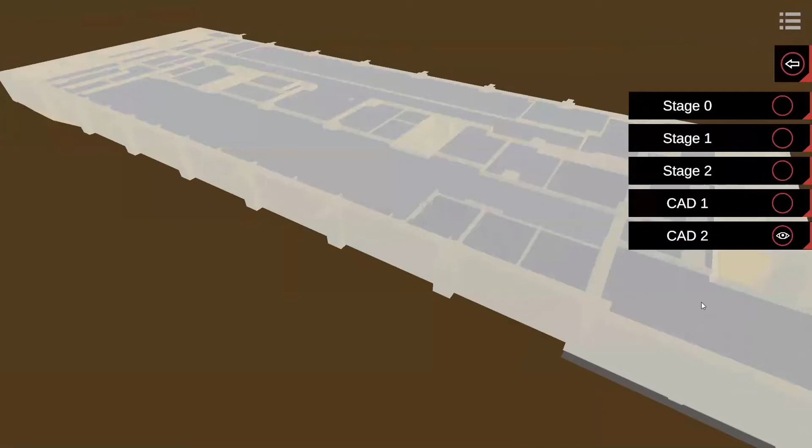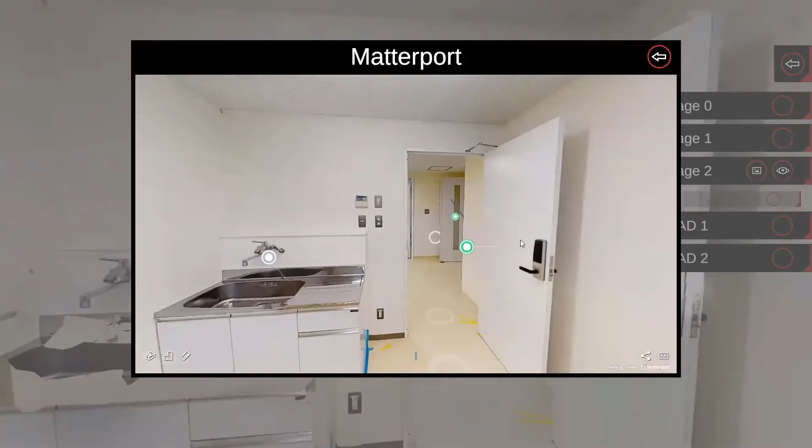So we are working for the digital construction department within Nohara, our team, and we provide services within BIM, consulting, 5D cost estimation, and digital twin solutions together with our partner SimLab. A video I'm showing you right now is our latest project together with our partner SimLab, and we're showing you here Okubo Hospital, which is displayed in the Stages app from SimLab.

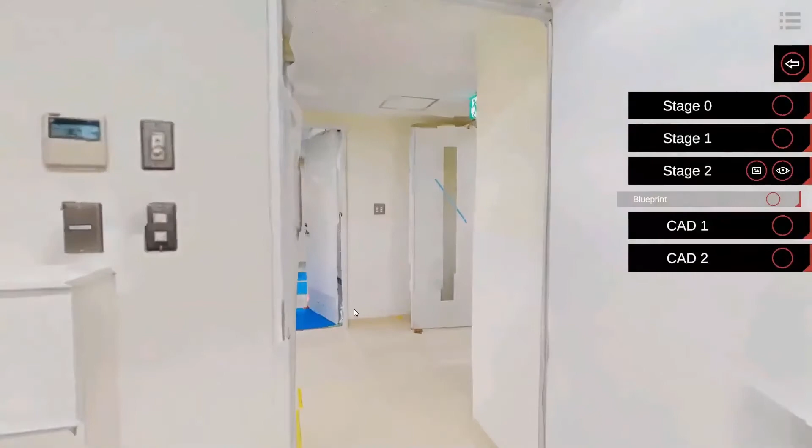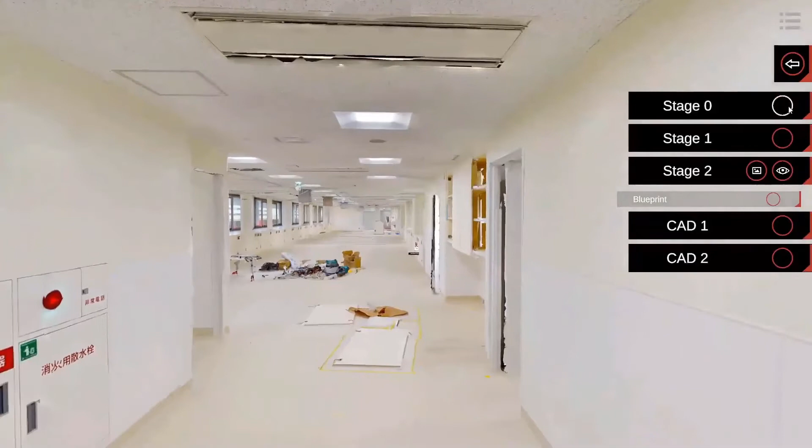What you can see here is a Matterport 3D walkthrough; we used the Pro 2 camera to scan the hospital. We went there 3 times and did 3 stages of scanning. And of course, we tagged all the Matter tags here with information for our MEP contractor for medical gas, ventilation system, and doors. All the construction material that we provided for them.

So let's have a look at the current state of construction. What I'm showing you here is no groundbreaking news. You've seen it all. You've heard it all before. The construction business has generally been considered a traditional industry with limited appetite for innovation. We all know that. The economic sector with the lowest productivity gains actually, but we are all participating in this event to change that, right?

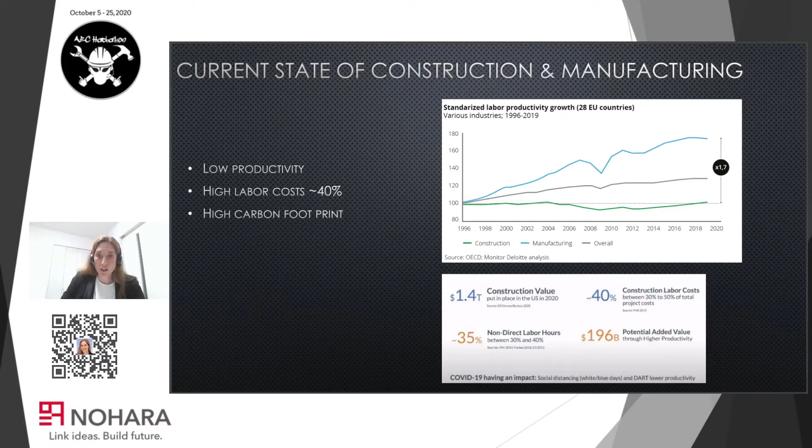We also think that companies like Nohara that are manufacturing and reselling materials can make a change because construction materials are closely related to productivity. They can have significant impact on labor costs as well as on the quality and sustainability of the assets. And let's not forget, there is a huge potential. When you take a look at the top 100 global construction companies, you will realize that 15 companies are from Japan. So there's a huge potential.

So what are the challenges in our industry? There are some specialties to Japan. And when it comes to Japan, you probably heard of the chronic labor shortage that is caused by the nation's shrinking working age population. Also, what is special to Japan is natural disasters. There is, for instance, the Pacific Ring of Fire. And that area is just around Japan in that region. And it happens to be that area where 80% of the largest earthquakes happen. So basically a pretty dangerous place to live.

So what are the external industry challenges that Nohara is facing? So let me give you an example of the current estimation process. Let me paint you a picture of how it looks right now. So a subcontractor will receive a bill of quantity from a general contractor, and this subcontractor is an interior contractor for LGS profiles and partition walls. So he will receive this BOQ probably in an Excel file or PDF format and some 2D drawings in PDF. The line items in the BOQ will probably be like total amounts. Maybe if he's lucky, there are some amounts per room, but he basically has no clue where those quantities are.

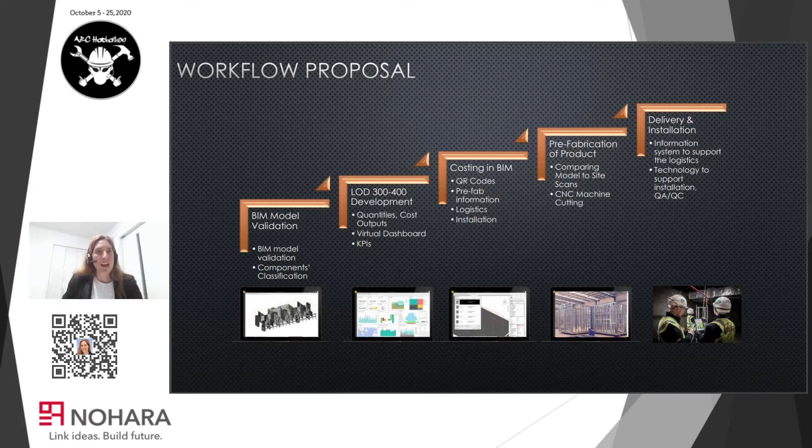Then we can match the models with real-world scans to ensure CNC machines receive accurate data for cutting parts needed for site delivery. So this is the rough workflow of our proposal. Now I'll hand over to my colleague Adam Piaskowski, and he will explain this workflow proposal in more detail.

Thank you, Stephanie, for the context and for the timeline of our presentation. I'm going to jump straight into model validation. In order to validate the models, I want to highlight the biggest obstacle when we do costing or detail enrichment: the quality of the models. That's such a big obstacle, and it's like a foundation for everything else. If we get this wrong, everything else is going to have problems.

To ensure the foundation is correct, we need to share what is part of our process with the rest of the team, so they can incorporate our considerations into their workflows. The easiest way to do this is to create a guideline which we can easily explain, helping the rest of the team involved in model creation understand how to set up the file so it's reduced of most errors.

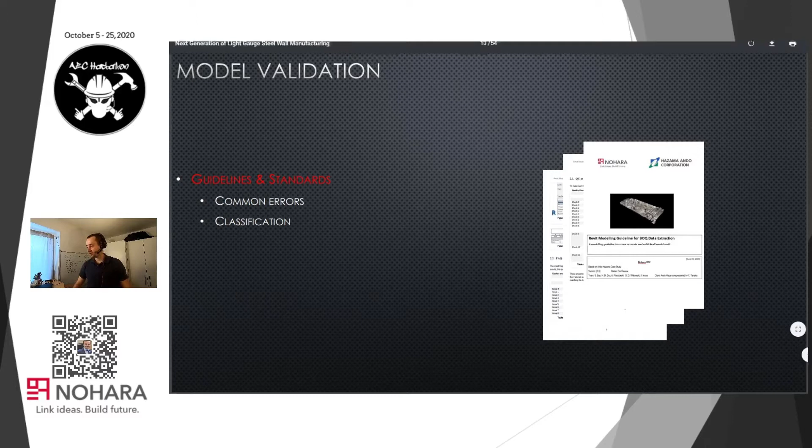Let me show you a couple of common errors we have in the models. First I should refer to a method for validating those errors. Every model has warnings, Revit warnings, and usually it's common practice to ignore them because Revit tells you that you can. So why would you not ignore them? Then often there are problems which you can't resolve.

For example, part of the frame inside a door family is going through a wall, and you know this is the size of the door and this is the size of the corridor, and you want it this way, but maybe something is wrong inside this door family causing that clash. Later when we take quantities and check the area of this door, it's reasonable this error shows up. Maybe there's a floor clashing with another floor, which creates an overlap and increases the area or shows inaccuracy. Maybe there's two walls overlapping, or a wall slightly off axis, and when we try to generate geometry inside that wall, all the generated geometry will have the wrong reference point and be slightly skewed.

So we do have tools where we can check what kind of error this is and what kind of warning message it gives.

We can also highlight using Dynamo what kind of errors are where, and this is a little bit easier to troubleshoot than troubleshooting the Revit warnings, because Revit warnings just give you a general list, and then you have to press on each warning and it will tell you where that warning is located, and it can be a very lengthy process.

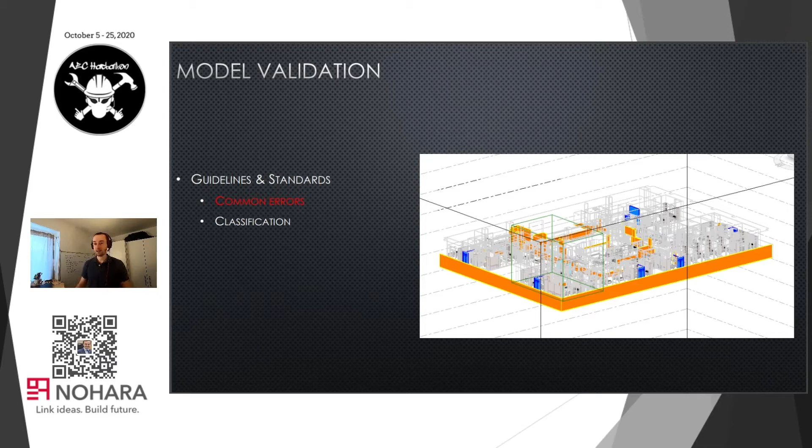But there are also warnings which are not very visible or not even highlighted by the warning script. For example, when we generate finishes, sometimes the door geometries are perfectly fine. They're cutting the void through the first wall, but maybe not cutting voids outside of that first wall. So if we add a couple of millimeters of baseboard, this baseboard is not going to be cut because the void of the door is not long enough.

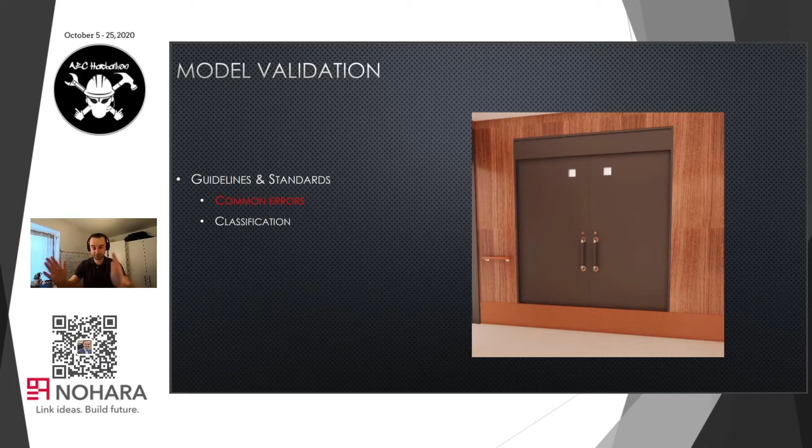There are also other errors which are actually very easy to make. I don't know if you guys ever tried inside of Revit joining 3-4 walls of different type, of different thickness, where maybe their layers are slightly offset, which is maybe the way it should be, but Revit doesn't want to really accept that.

And sometimes there's a small omission, and for example a wall goes a bit longer over the connection, and then once we want to generate this wall, it will take each one of those walls as separate elements, and that little partition part of the wall with the wrong wall type will be framed as the wrong wall type and will give us inaccuracies again.

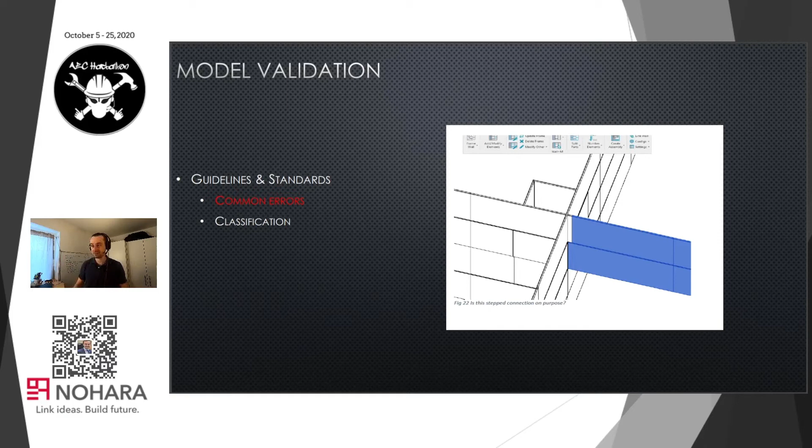And then lastly, we have classification. It's a common standard to use different classifications. In our case, we are mostly looking into Uniclass, which is very popular right now in the UK. Before that, we were using MasterFormat. I know there are many other standards in Europe, Australia, New Zealand, the US, and so on. We can actually assign any of these classifications.

However, they all kind of lack certain components. They lack certain precision at our level of manufacturing, so they are more general, more general for systems, more general for products. However, they often don't have the distinction between the same product family but different thicknesses of those product families, or maybe systems which have different spans between the studs, in our case for steel structures.

So we are creating our own classification code which can accept any kind of differentiation that we want to achieve, and we basically go with a code. We go with the most obvious part, which is our standard classification material code. Then we add the layer thickness, then we can add stud information, then insulation, then the stud profile, and so on. So we can very accurately specify what kind of information should go into these.

And then we can of course link other classification codes, and often we see that there is a repetition - the same classification code for different codes. That clearly shows that we don't have enough distinction to cost these elements using the standard classifications.

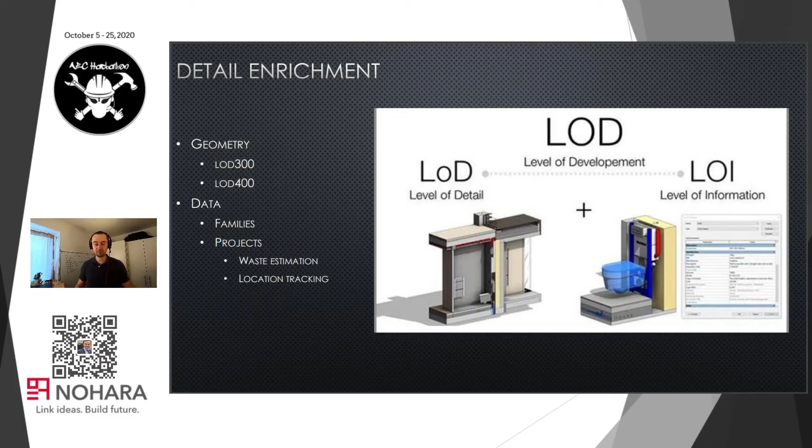And then at LOD 400, that's where we add more detailed information - that's when we generate specific plasterboards, steel profiles, screws, connections, etc. And then we also add data to those elements, both at LOD 300 and 400. That's where we add information about the location of those elements, the waste estimation, the parameters distinguishing projects and families, and also how we can choose those projects and families that are a composition inside of our model. So there are different levels of development, and basically it goes from a lower level of detail to a higher level of detail.

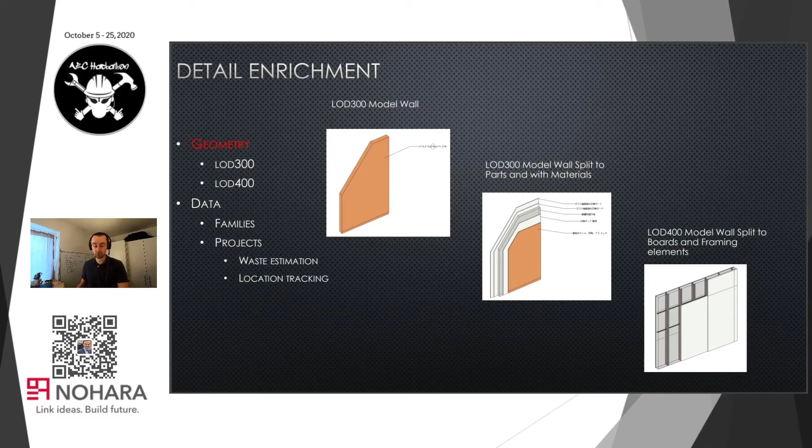In our case, if we enrich a level of detail for a wall, we start with just a generic wall. We add layer information to this, and then split it into parts, where each layer is a separate part. Then we use AGACAD, a software for detailing, to split those layers into smaller parts using horizontal and vertical grids, which divide our plasterboards with rule-based schemas. They replace wall layers and place steel studs inside of those layers. So this is how we add information to geometry from data.

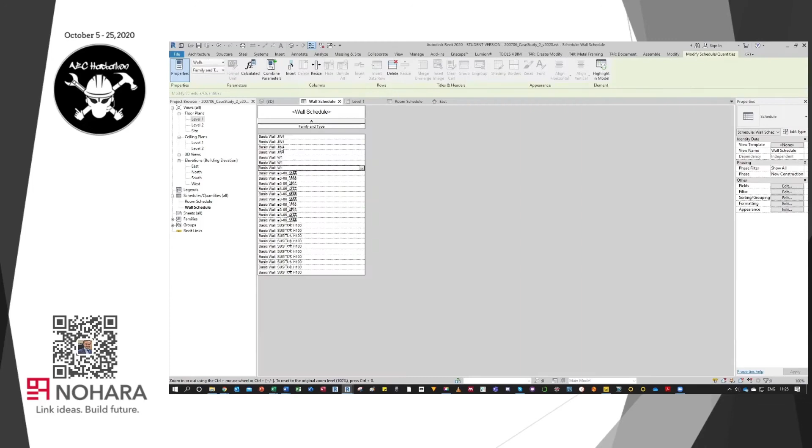For example, we can generate finishes and baseboards. Here you can see how we generated this paint layer, which is separate from the main wall. We can also frame the main walls, select just these main walls separately, so we can cost these layers separately. The importance here is that we can have a structural wall that goes between many rooms and then have finishes that are dependent for each room. So it's a nice division.

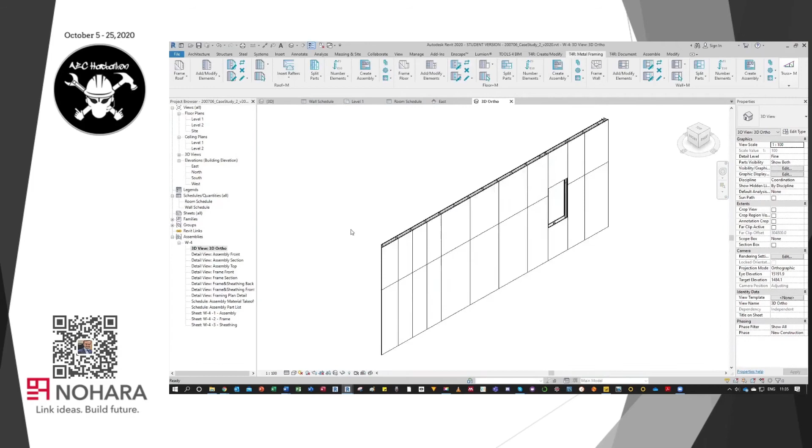We can also create assemblies from these, choosing certain elements that we want to use for assembly. We can number those elements and place them on sheets. We can also dimension them and create shop-ready drawings for that.

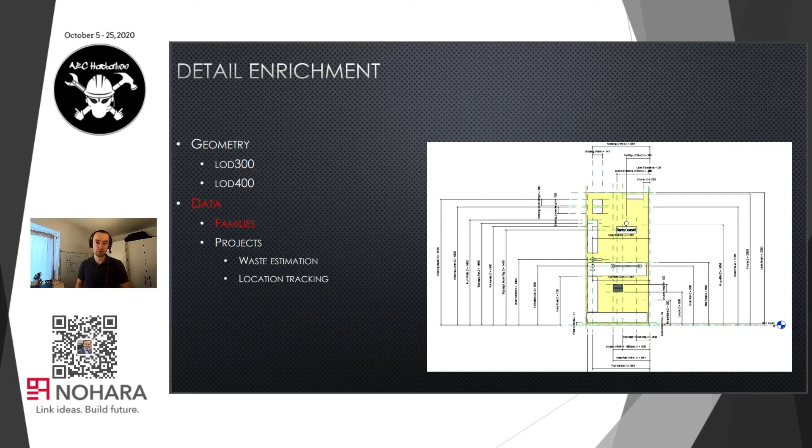We also enrich data when it comes to families. For example, Nohara is a manufacturer of doors, and to manually cost specific doors, we're not talking about just doors you could install in your home with a handle, leaf, and maybe a lock. We're talking about doors for hospitals, which often have mechanisms for fire prevention. They're actually sliding, have special acoustic properties, pneumatic opening, and so on. So they are very complex door families, which take a long time to cost manually, because they can all be different, with different dimensions, different materials composing them, different frames, etc.

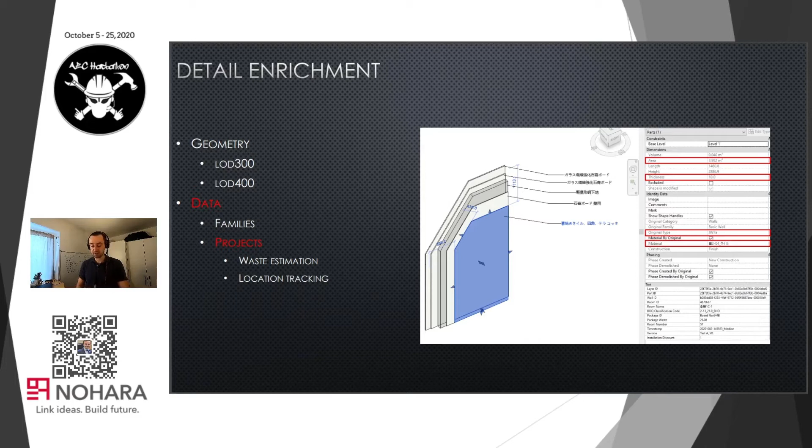It takes as long as 2 weeks to cost one type of doors, or maybe one project with different doors for a client. And 2 weeks later, that information might be no longer relevant. So we try to make a system which enables costing those families and doors, choosing and specifying them as we go. We have a drop-down list, we choose all the components, they are all costed and connected with a classification code, and they can very easily be assembled together. The price is a bit like specifying a car purchase online.

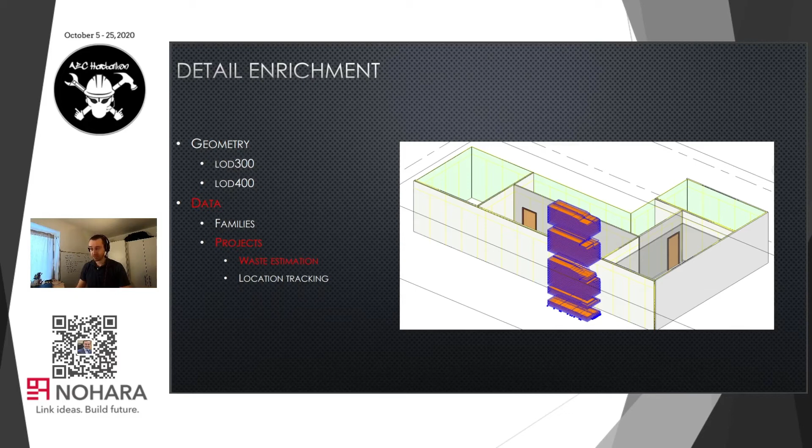We also enrich data by adding waste information. We can use bin packing algorithms thanks to the miscellany package in Dynamo. With this, we can cut our plasterboards into parts and estimate which parts can be reused in which room. The bigger the project, or the bigger the area that the same plasterboard can be applied to, usually the lesser the waste. So we can optimize that waste quite considerably by using offcuts in different locations.

Then we can apply QR codes to those plasterboards to know where that element could go as an offcut. So whoever installs the board on site will know that this plasterboard has its use application in those rooms, and if there's an offcut from this plasterboard, that's where it should be located.

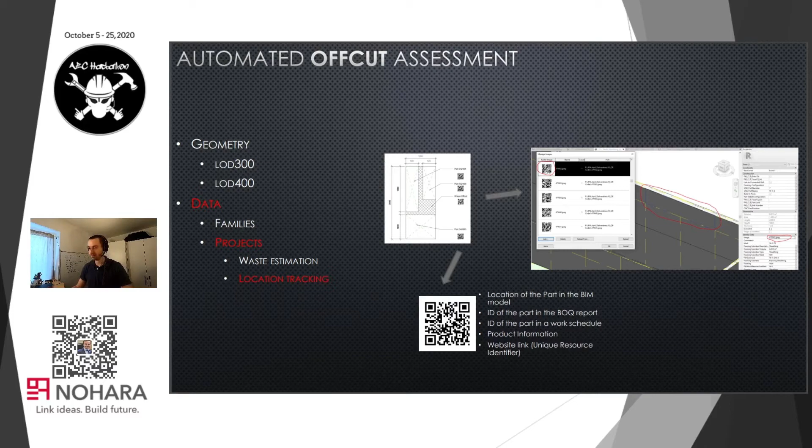Of course, there are some limitations to this. You're probably not going to move a plasterboard from the first floor to the other end of the building on the fourth floor, because the logistics of moving that plasterboard might be more expensive than the actual plasterboard. But if you can safely use an area which is optimal for moving that plasterboard and reuse the material, then it's not just the cost that's optimized, but also the waste and the care for our environment.

We then merge this data. We take the product information and the geometry information and the location information that was added to this geometry information, and combine it all together to give a meaningful report to executive viewing, so that we can have the cost report, and a 3D model annotated with this information on top.

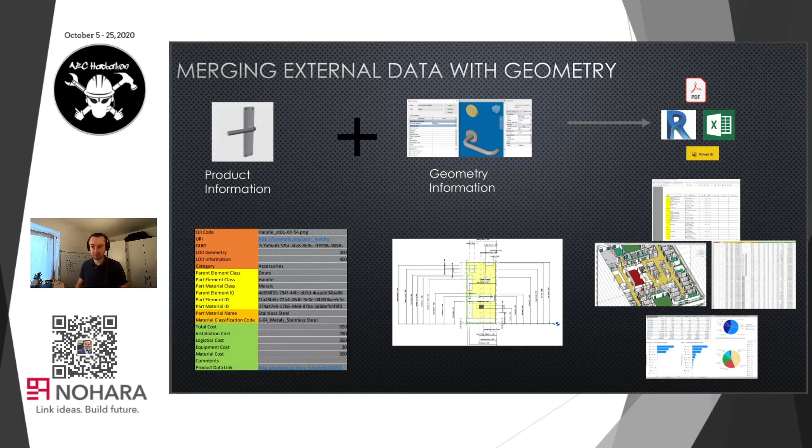We can have variable cost models, so if, for example, we compare options, change layouts, change setups, change materials, we can very easily see how the choices the designers make can affect the cost.

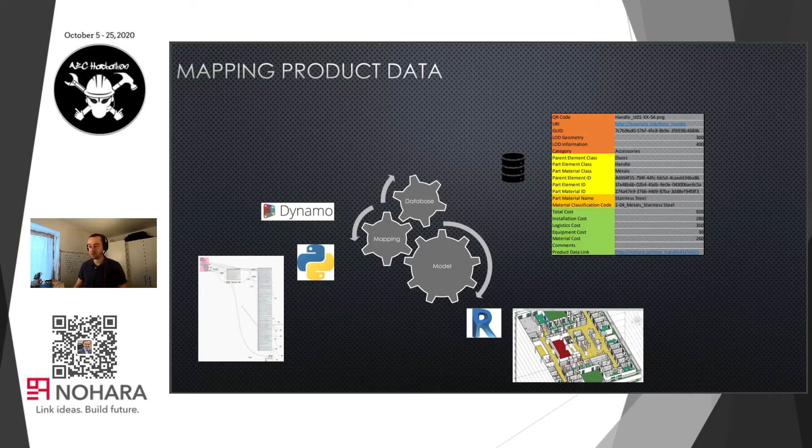The way we map this data is by using Python and Dynamo, and we basically use classification codes to map the database with the geometry in Revit, and export this into new data files. So here's a video of how this process works, along with the enrichment of data.

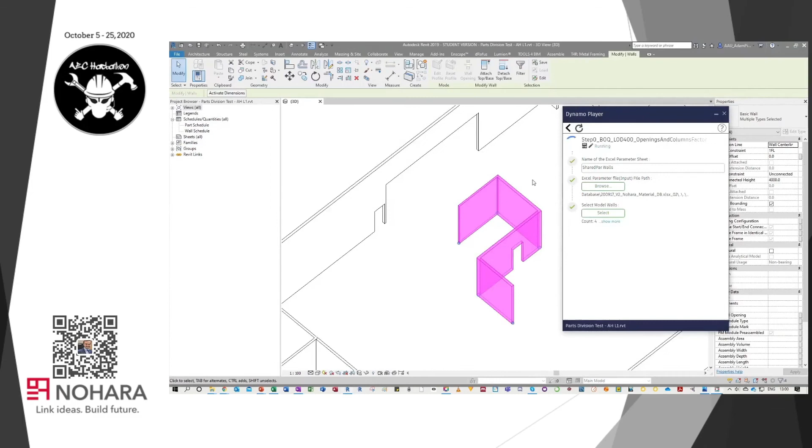So as you can see here, we have a model which is divided already into plasterboards and framing. However, we're just going to create this from the start. So here's a couple of walls with a door inside, and as you can see, AECH is doing its magic, and it's splitting the walls into plasterboards and frames.

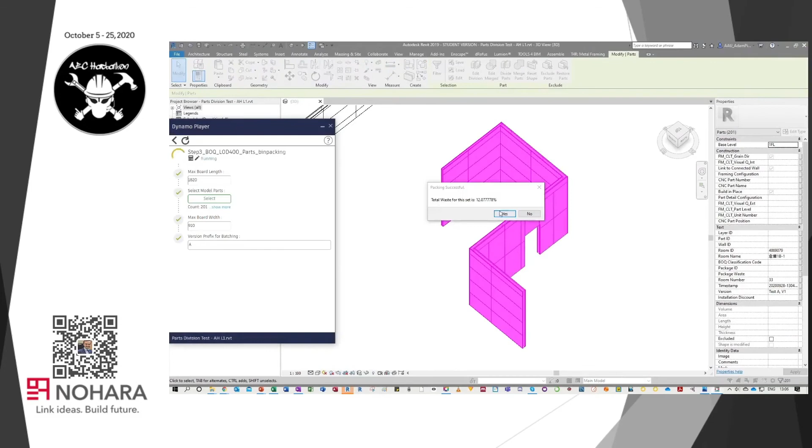And then we are actually adding information to those plasterboards. So right now we're adding the classification code, and then we are adding other information such as room ID and location and the parts ID, so that we can recognize where those elements are.

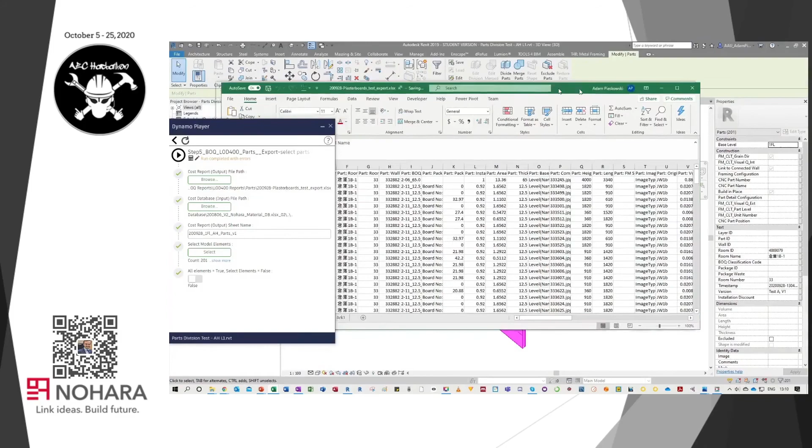We are then adding QR codes, and you can see here that the QR codes can be checked on each element, and scanning with your phone could give you the information that's contained within the QR code. And then the elements are ready for export.

So here we can just load this information to Power BI, and we can show you some simple graphs, how we can filter this data and show you what kind of costs are associated with this data in there. So there are also different cost factors which are influencing the final cost, and that could be, for example, openings. We need to put extra reinforcement around openings if we are not having this done already by an LOD 400 model.

But if we're looking at LOD 300, we don't have the accurate geometry of every steel frame. So we create some assumptions for where that steel frame could be more expensive. We can also look at installation complexity. So if we have a column, it's probably going to take significantly more time per square meter than it would if it was a flat wall.

The same with openings. So we can actually use algorithms to derive where these occurrences exist in the model, and we can apply factors which are going to factor in the costs. And that can also work for productivity ratios and price development. So for example, if we only have so few of this material in the model, its unit price is going to be significantly higher than if we had, I don't know, 10,000 square meters of this material, because of course the economies of scale influence the cost.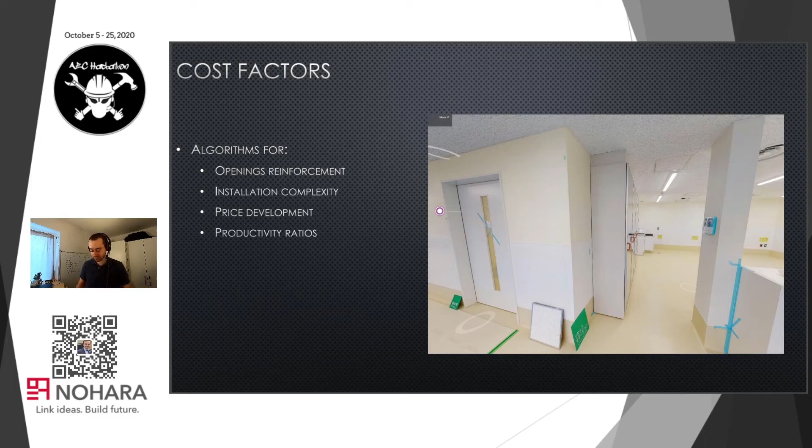It is again very case dependent, and you can see that the bigger the area, the lesser the waste, and the smaller the area, the higher the waste. So it also depends on the size of our building and on the reusability of a certain material type.

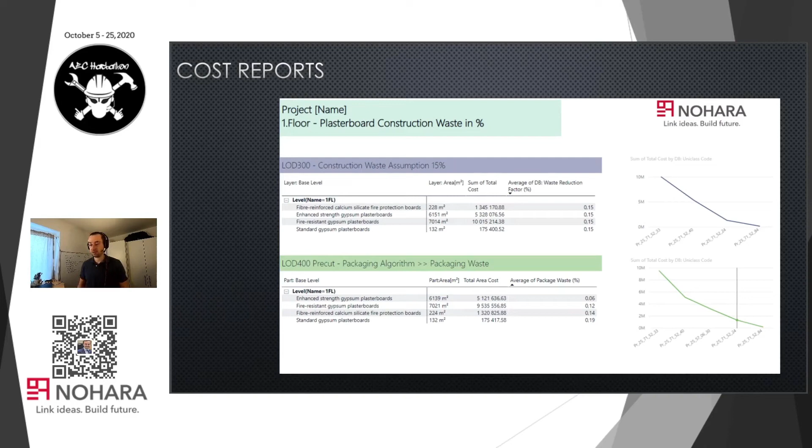So just to sum up this section, we can reduce waste, we can reduce manual errors, because the errors that can really happen are only at the beginning when we validate the model. And there could be errors in the way that we do calculations, or there could be approximation errors. However, they are very easily looked into, because this is basically just a sheet with different kinds of factors and different kinds of multipliers and a cost database, which has, let's say, a few hundred entries.

And then from that, we can generate thousands of individual price points for each element, which we can later filter. And it's much easier to find errors, if there are any, rather than if this was a manual calculation performed by a single individual or a group, which had a certain way of doing it, and communicating that method to somebody that would validate this would be more difficult.

There is, of course, an entire reduction in errors based on the fact that it's a computer that does the calculations, so the human error is also omitted, beyond just having the wrong price point or a wrong factor.

And also it's very dynamic. So if we change the model, if we change something in the model setup, it's easy to recalculate that change following the change update. However, this is not a magic bullet. The setup is quite a lengthy process: to set up the generating software properly, to set up the databases, to set up the classifications, set up the workflow order, families that enable this parametric design.

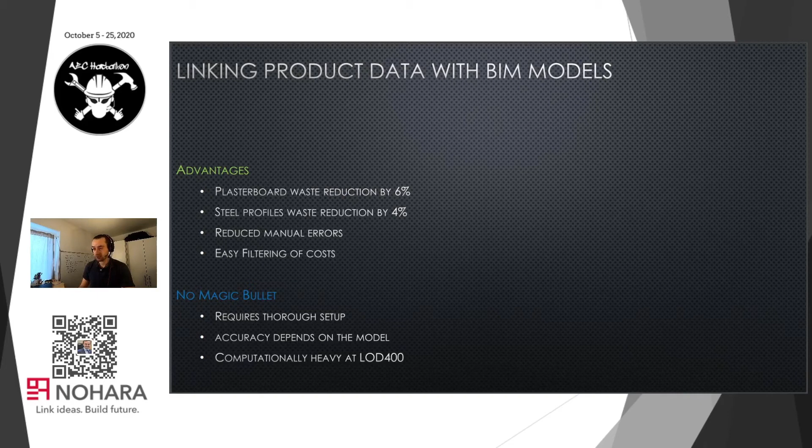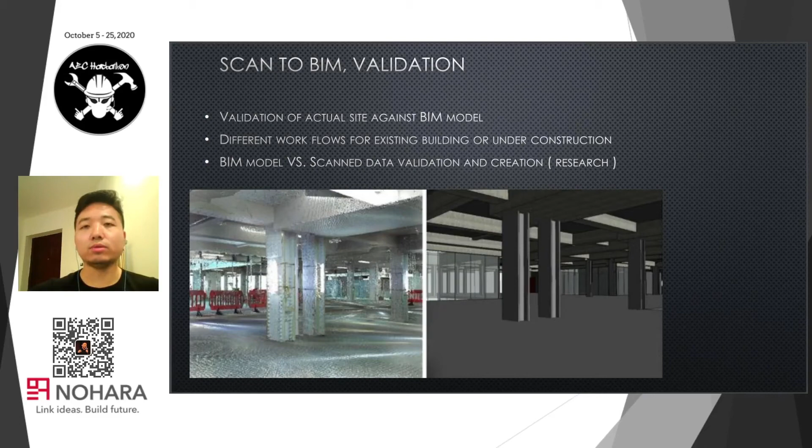Now I'm going to talk about the idea and concept we are exploring and researching, which is how to do the validation and comparison, or even auto-generation, between the scan data and BIM model. As we all know, there are basically two directions. The first one is regarding the existing building: we need to generate the BIM model on top of the existing conditions using laser scan or other tools. The other way around is the new project: we need to keep updating the BIM model so that it can match the as-built conditions.

For renovation projects with the existing building, the most used tool is the laser scan, and we generate the BIM model using the scan data as the foundation. And for ongoing construction, we do the laser scan or some other scan. We can have the as-built model so that we can do the BIM model validation against that.

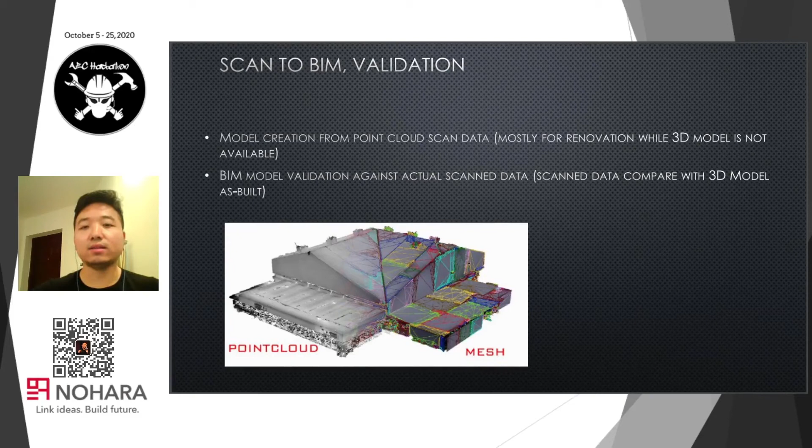There are some tools we are researching. Here are just two examples. The first one is Cintoo. What they do is the conversion between the laser scan and the digital twin. It's a middleware. We can import the digital twin laser scan data, and they can do the validation so that it can support generation of the BIM model, or compare with the BIM model so that we can find mismatched places. Of course, the software keeps updating, and they may have many new functions we do not know of. So this is just one explanation of this software.

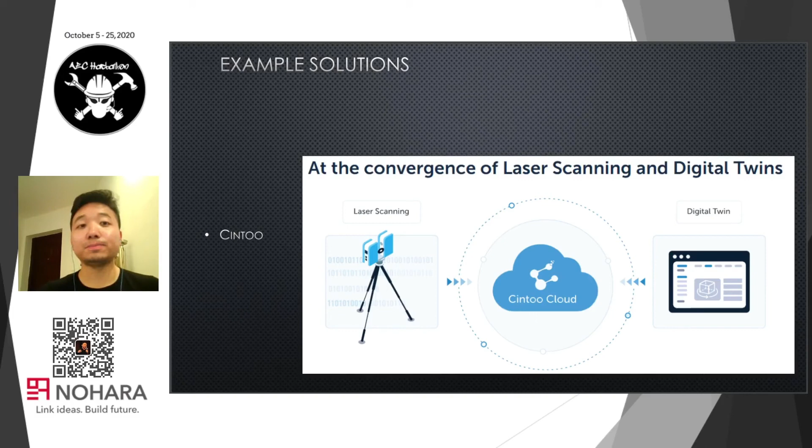On top of that, they have a really smart algorithm. They can auto-detect certain objects, whether this is a door, a window, a floor, a column, or a beam, so that it can help us generate or update the BIM model. Of course, the software is not perfect. There are certain parts with stupid mistakes.

But anyway, what we are trying to explore right now is whether there's a certain tool or best practice for a much more efficient and smart way to do the validation or even auto-generation from the digital twin model to the BIM model. So this is what we are trying to explore.

Of course, we want to reach out to our audience. If you have new ideas or existing practice, feel free to contact us. Your suggestions and ideas are very welcome.

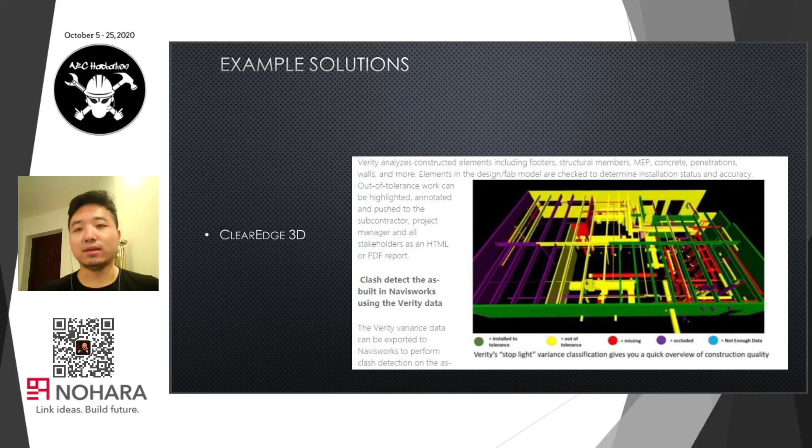I would like to now show you how our team used the process mentioned above to create one of the core products, which is NPITA. Based on the architect's model, we make the precise element parts so we can make a proper cost estimation and also the prefabrication drawings. But actually, what is the NPITA product? It's an indirect unit for lighting, which can be installed on simple ceiling constructions.

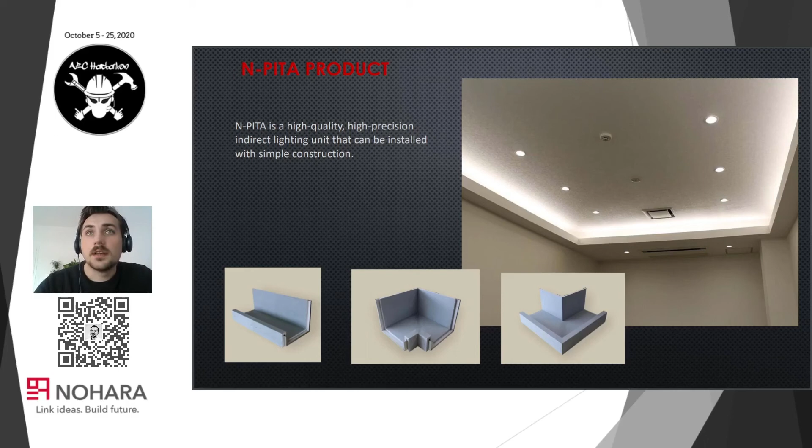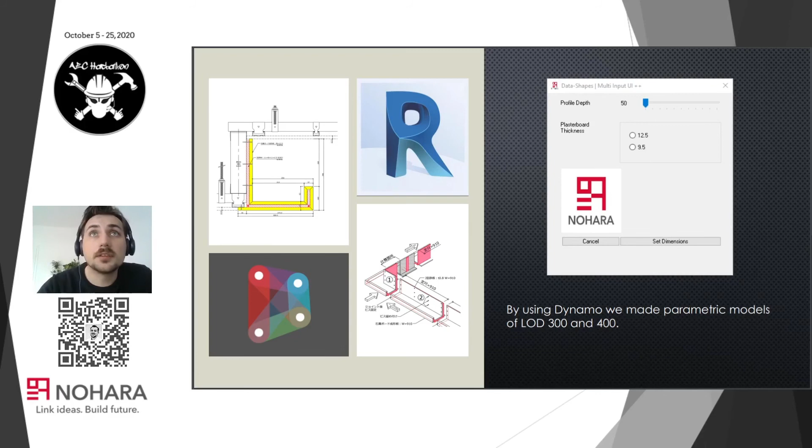We wanted to create a precise BIM content model with manufacturer data and ready for prefabrication. To do that, we use Revit software to create LOD 300 models and Dynamo to create the LOD 400, making it more customizable. We used Data-Shapes to create a kind of user interface where we can configure the profiles with all the dimensions. So let me guide you now through how an N-PITA model is actually created.

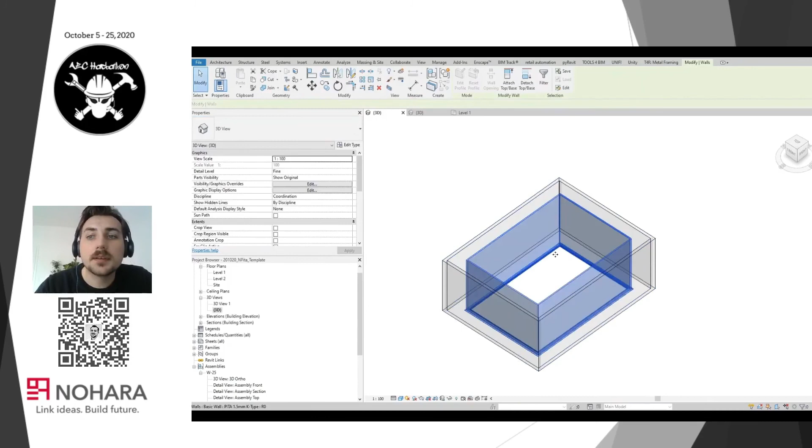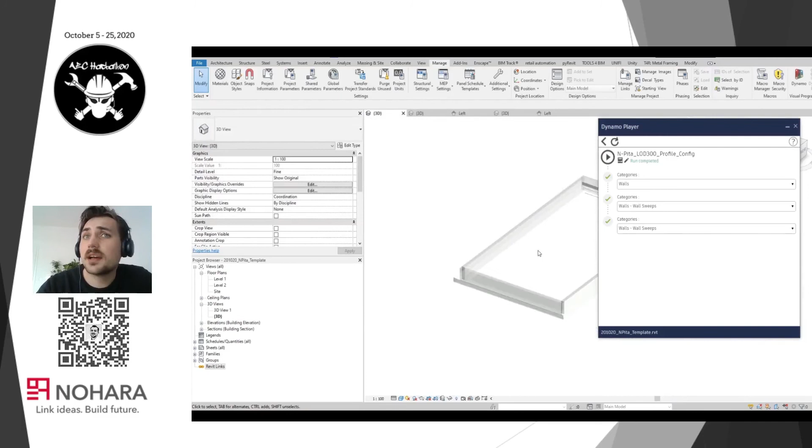For LOD 300 we use wall system families to insert the N-PITA profile type as a sweep, and by using the Dynamo script we change the profile dimensions to prepare it for the LOD 400 model. As I mentioned before, we're using the user interface from Data-Shapes, so we can change the plasterboard thickness and profile depth. This simple model can be used by architects for lighting visualization, for example.

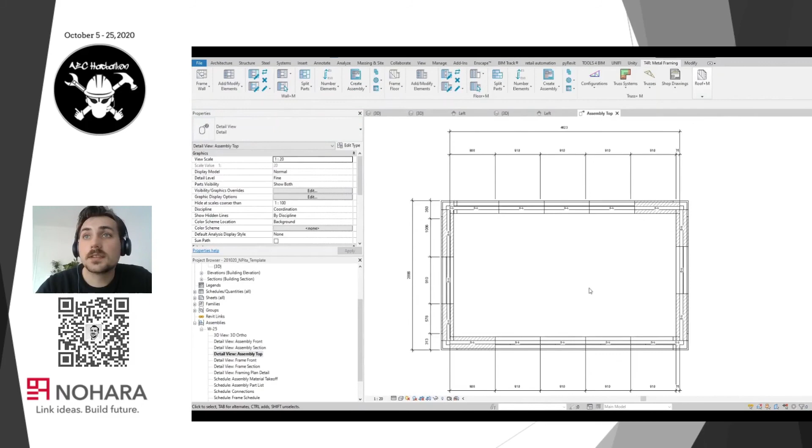After that, we're using the AGACAD tool to create the proper LOD 400 model with studs, plates, and covers, so you can make precise cost estimations. In the end, we create an assembly with all these parts, and Dynamo scripts help us automate dimensions and tagging. With fully detailed drawings, we can easily automate the manufacturing process. Instructions and drawings can be easily used for CNC machines, and that's exactly what we're doing right now.

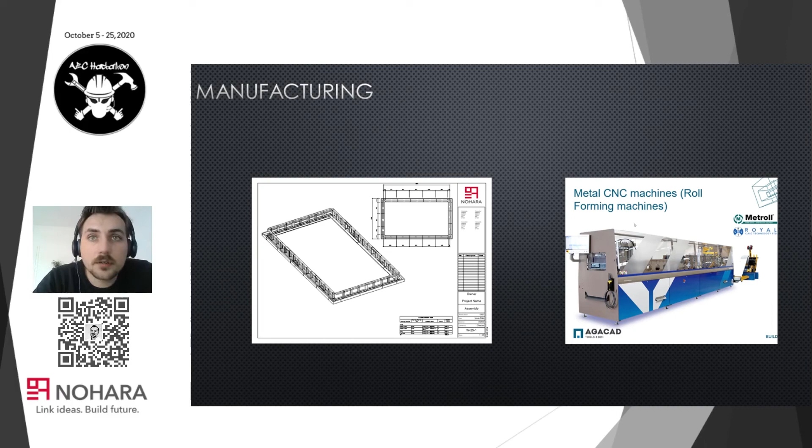But in the future, we plan to create manuals using augmented reality models to fully use the available technologies. By using QR codes, for example, we could locate elements on the construction site from the model. Unfortunately, for now, we still have to wait for augmented reality hardware to become more practical and widely used.

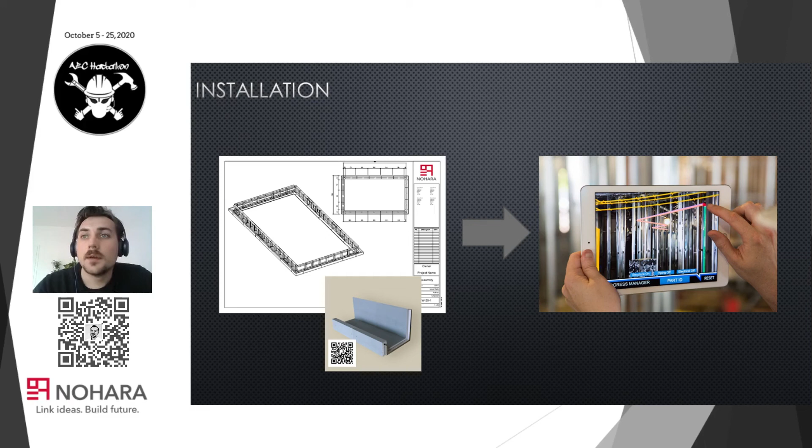So we've come to the end of our presentation. We've showed you our current state of affairs. We explained how we want to disrupt the current business model by making pricing more transparent and automating cost estimation processes. We talked about model validation and the importance of high-quality BIM models. We talked about our research on scan to BIM, and we showed you how we can automate framing with AGACAD, create assemblies, and add QR codes with Dynamo. We also talked about waste reduction today.

And please let me remind you, this is coming from a manufacturer. Our business is to have high volume sales. But still, we think this is the right approach, because if we want to change the game, we need to adapt as well. And we are convinced that by providing those solutions, we can set ourselves apart from our competitors, and eventually this will lead us to more customers.